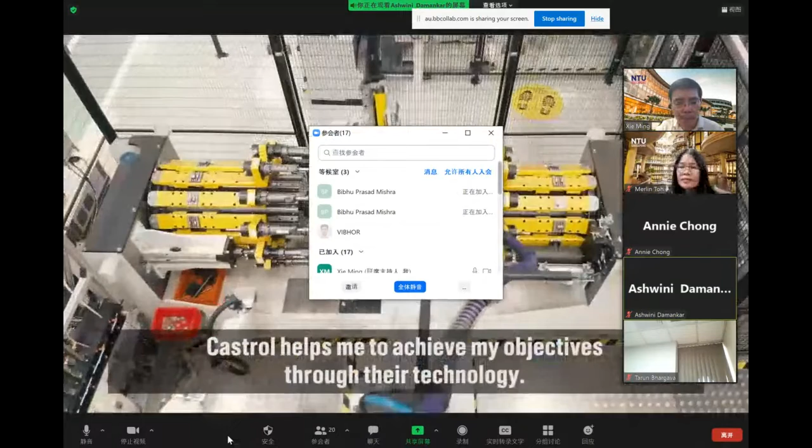When we work with Renault, we try to put the best product, but not only the best product, the best technology and the best team inside to manage this combination of product, technology and process.

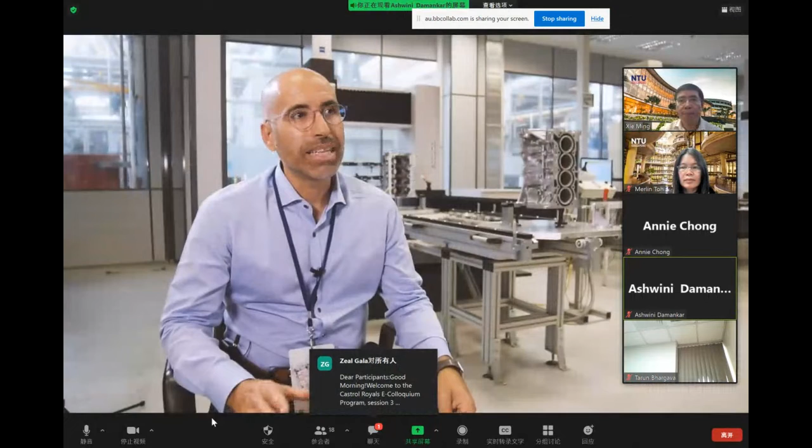What are we looking for about lubricant suppliers? It's the most cost-effective product to go with very effective facilities with digital monitoring. This is clearly the case of the XBB technology and CCC, the Coolant Compatible Cleaner. We understand that one of the needs the customer has is reducing waste of water and cleaner.

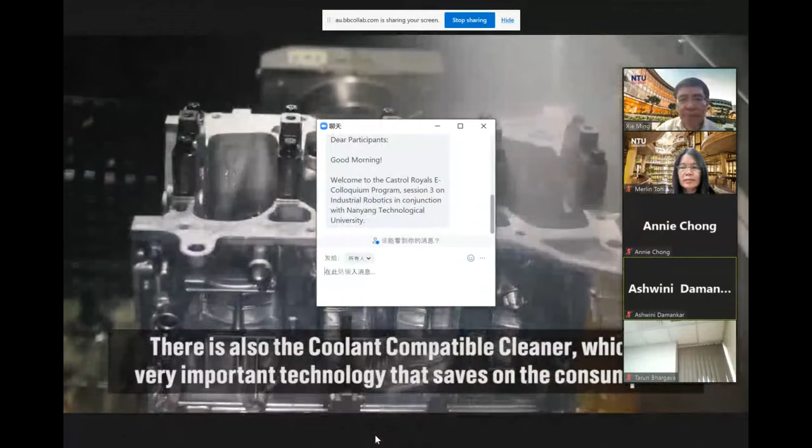With this great innovation from Castrol, we are able this year to save 1 million liters of water.

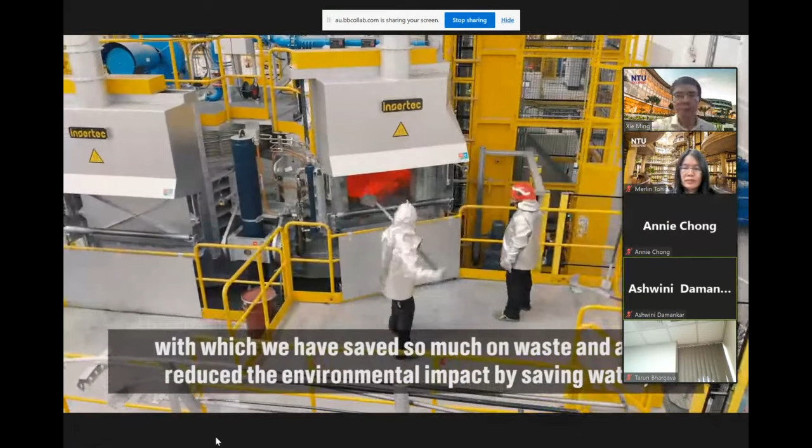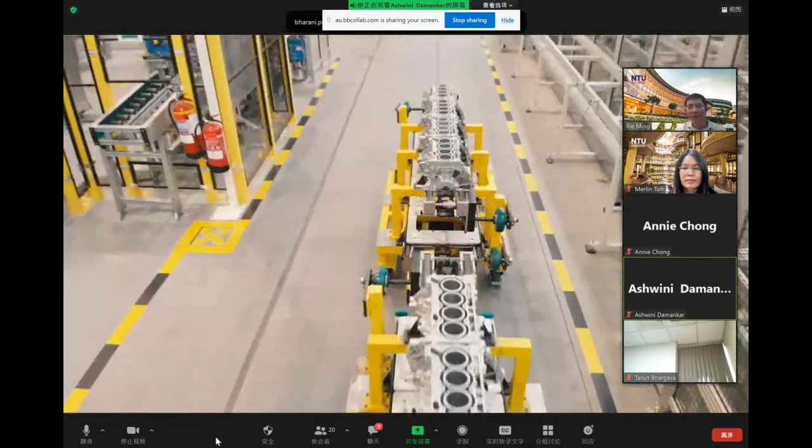When we have this combination of coolant and compatible cleaner inside, we put another resource in place - not only the team who manages this, but the Smart Control system that we can use to control 24/7 all the key parameters in the coolant and the cleaner. That's how we close the cycle.

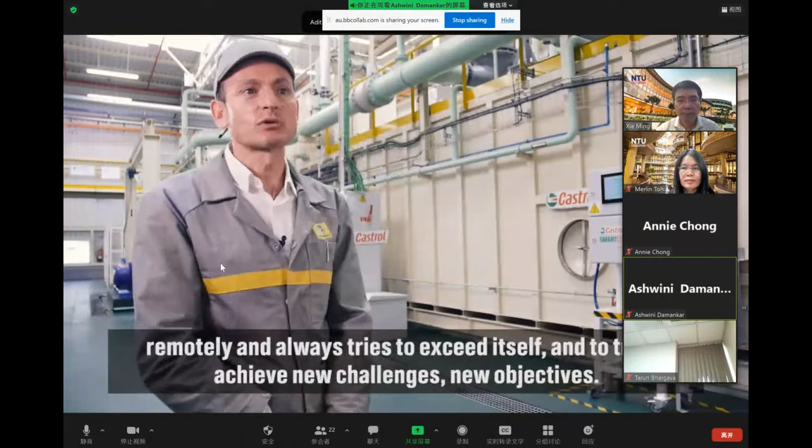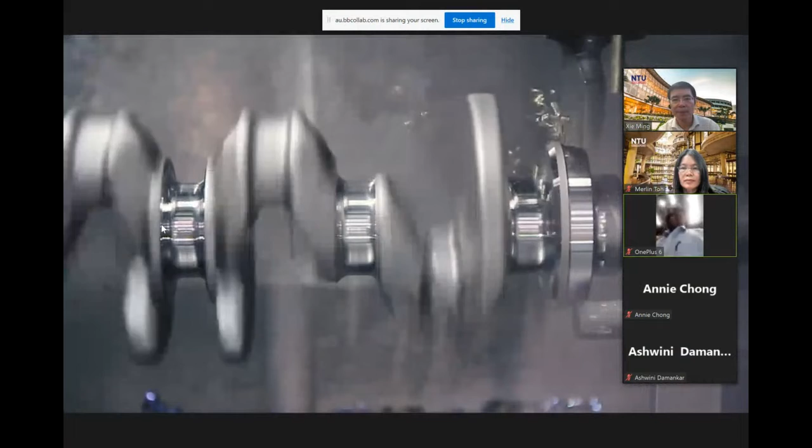This is a real partnership. This is not a relation of supplier-customer. The partnership with Castrol is very powerful because Castrol is not expecting the request from Renault, but is very proactive in the way of making new proposals, new innovation proposals.

Today we have new products with new innovation. We don't know exactly what the future will be, but we know that with Castrol's partnership we can reach the sky. We can give the best cost-efficient products to our customer. We know that Castrol will bring us new digital innovation to follow the efficiency of the plant.

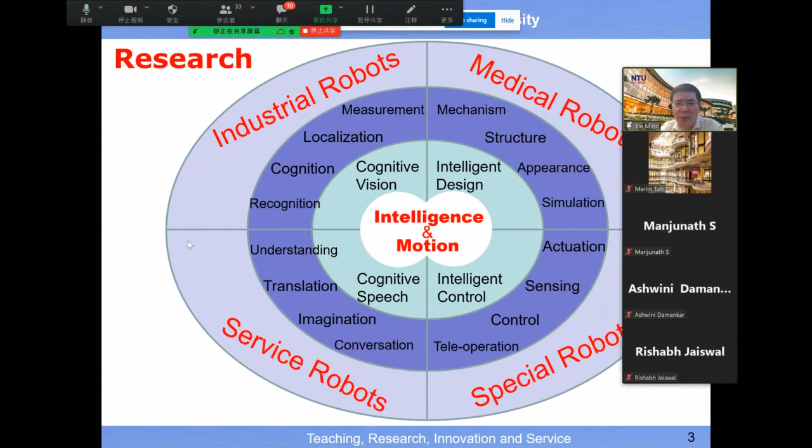From this, you can immediately understand the current state of the art in robotics, and in future the human-like robot may work in production lines, in manufacturing industry. Today, when we talk about industrial robots, the main focus is on the arm manipulator, but in future the arm manipulator can become a dual arm in the form of a human being.

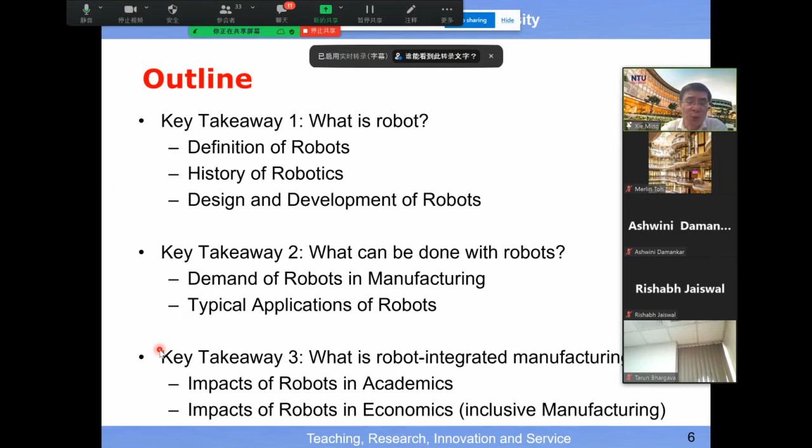So for today's session, since we are going to have 3 hours together, I will split today's session into 3 parts. The first part is about the definition of today's robot and the major steps involved in the design and development of a robot. The second takeaway is about the possible application domains in which we can deploy a robot.

And here I use this technical term, robot integrated manufacturing. I believe most of you have heard of Industry 4.0. Then you may ask yourself, what is the nature of Industry 4.0, and what will Industry 5.0 be? You can start to think about this question: what should be the next generation after Industry 4.0? If you start to think in this direction, then you may appreciate today's session, and later on we may have some discussion or Q&A.

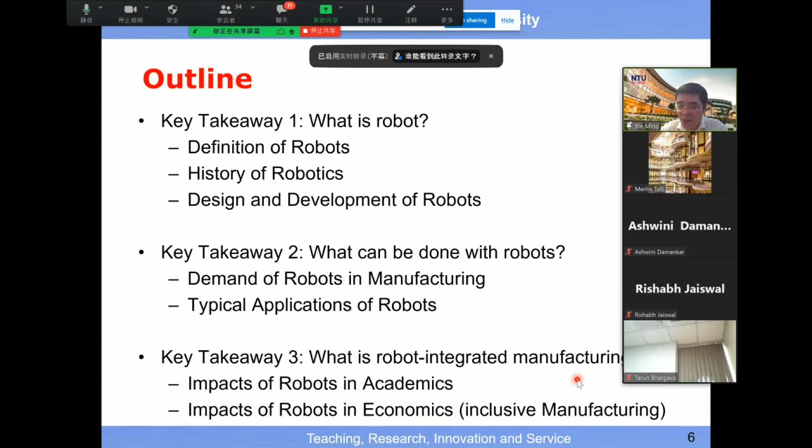So let's start with the first part, which is for us to know what is the nature of a robot, what is the new definition of the robot, and what are the key steps involved in the design or development of the robot.

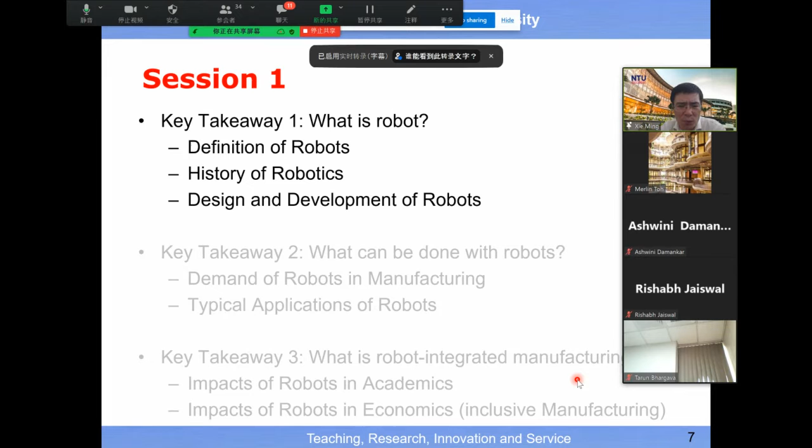Then you may ask this question: why do we need to invent machines, to invent tools in industry? The answer is to extend our physical capability and also to extend our mental capability. So if we enhance humans' physical capability by the use of a robot, then you may ask the question, how do we position a robot?

Today's robot can perform motion, and maybe tomorrow's robot may have human-like intelligence. Maybe after tomorrow, the robot may have life-like characteristics.

Okay, eventually we may put the robot inside this tree of life. So this is something for you to start to think about. Then what is life from an engineering point of view?

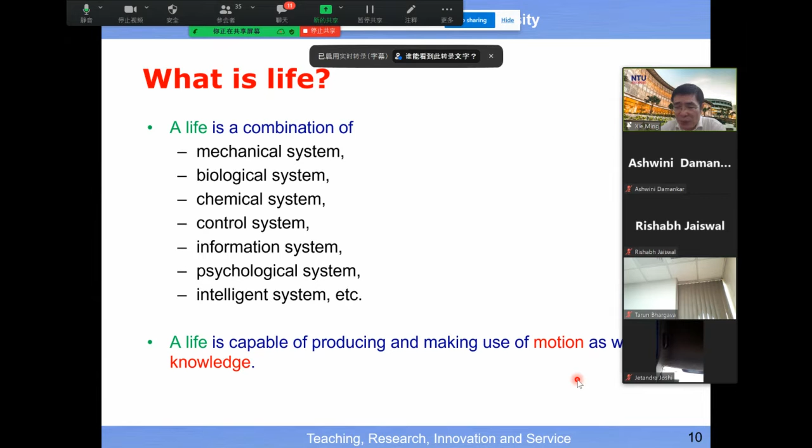Then the next question we may ask is: what are the limitations of life in the world, like animal and human being? And even for human beings, we can identify two major domains in which we can easily name some limitation. For example, for human beings, we cannot fly, and we cannot dive deeper inside the water. So that is a limitation.

That means we are limited in time, in space, in terms of the speed of motion, and also for the payload we can carry, we also have limitation. But in terms of knowledge, you may also see some limitation. For example, we may spend almost 20 years in school studying in order to get our PhD degree, master degree, or bachelor degree. That means it takes a long time for us to acquire knowledge.

And in order to process knowledge and perceive information, for example, our eye cannot perceive invisible light. And also about language, we can only understand or interpret the voice which is familiar to us. For example, if I start to speak French now, and for those of you who do not understand French, then you cannot understand what I'm talking about. So that is a limitation. We have a limited capability to interpret voice, etc.

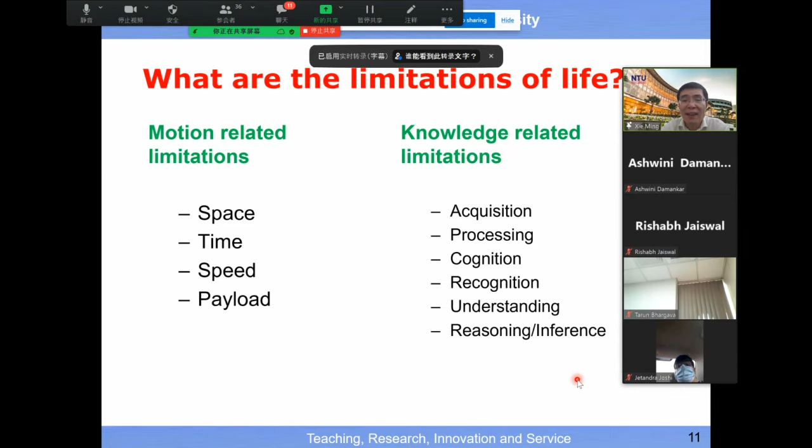So you will see for life, we have a lot of limitations. Then how to overcome our limitation? Just now I already mentioned. So the universal way to overcome our limitation is to invent tools and invent machines. Then in this way, this tool, this machine can help us extend our mental capability in terms of perception, processing, decision making, and also extend our physical capability in terms of locomotion, grasping, and manipulation.

So this is why we invent airplanes, so that we can also fly. We have a robotic arm, therefore we can overcome our limited payload, because we can use a robot to carry heavy payload. And in future maybe we can have a robot to assist us to study. Then in this way we can shorten our learning curve. Instead of spending almost 20 years studying in school, can we shorten this cycle time from 20 years to 10 years or to 5 years? So that is the motivation behind the invention of tools and machines.

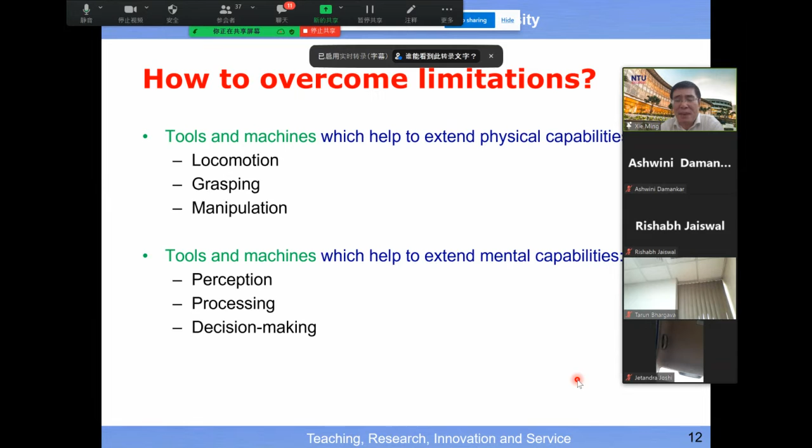Then the good news is, among all these machines, one special type of machine is called a robot. And in particular, we have robots which could be deployed in industry. So therefore, it is interesting for us to know or to understand the capability of industrial robots.

All right, okay, come to this question. Among all the inventions, what should be the most powerful one? Or if we do a little bit of analogy between invention or creature by nature and creature by human being, everyone understands that the most advanced creature by nature should be human being. Yes or no? It should not be the elephant, we are smarter than the elephant. Should not be the horse, though the horse can run very fast. But globally speaking, human beings are the most advanced creature by nature.

Then among all the machines, what should be the most advanced one created by human being? The answer should not be the airplane. Although the airplane can fly in the sky, in terms of complexity of motion, the airplane only has 6 degrees of freedom: 3 translation, 3 rotation. But for the humanoid robot, for example, the robot which looks like a human being, such a robot has at least 40 over degrees of freedom. So in terms of complexity of motion, humanoid robot is more complicated than an airplane.

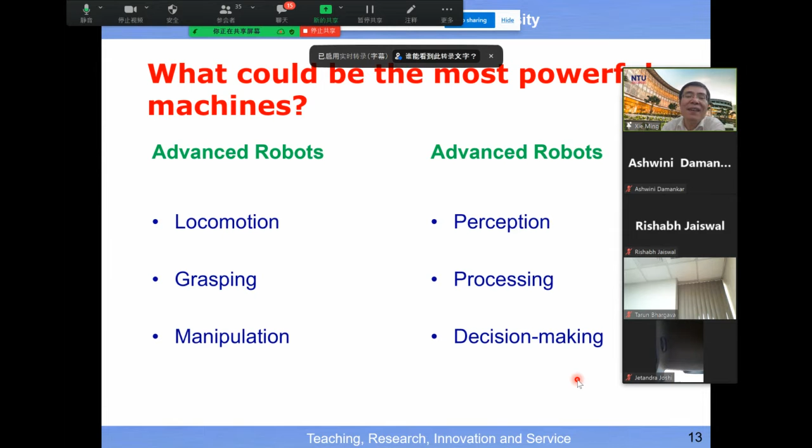So this slide helps you understand this exciting type of machine invented by human beings. Now I'll quickly go through some typical application scenarios in which we can make use of industrial robots or service robots. But I will come back again to industrial related applications.

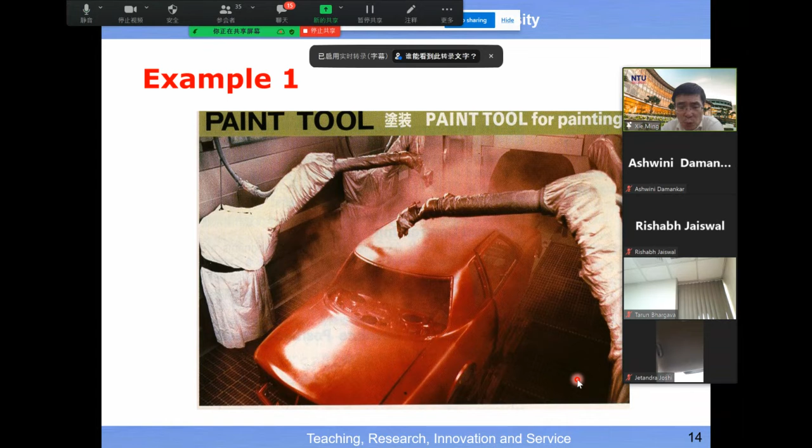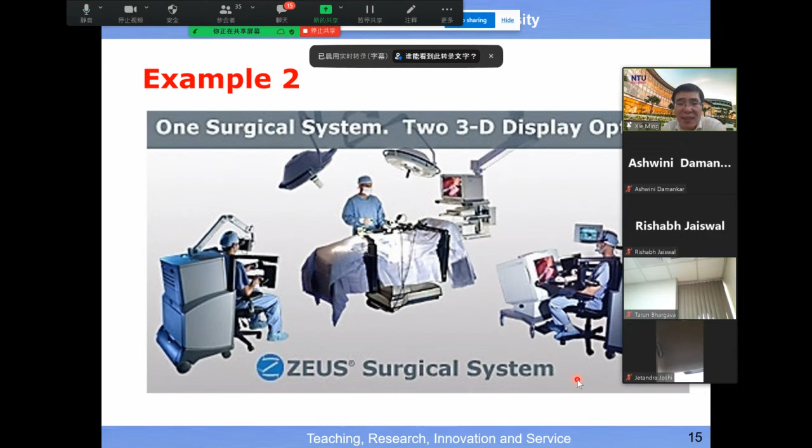By seeing this picture immediately, you understand robots can help us do painting, and robots can extend doctors' physical capability to undertake surgical operations in a very, very confined space, for example inside the body of a human being. And also robots can help us extend our physical capability for building construction.

So you will see human beings just sit inside the control room. This is the indoor environment. Then for the outdoor environment, we let the robot do the job for us, because the outdoor environment could be humid, could be at high temperature, okay, or a noisy environment or dangerous environment, etc. Therefore human beings just sit inside the control room, right?

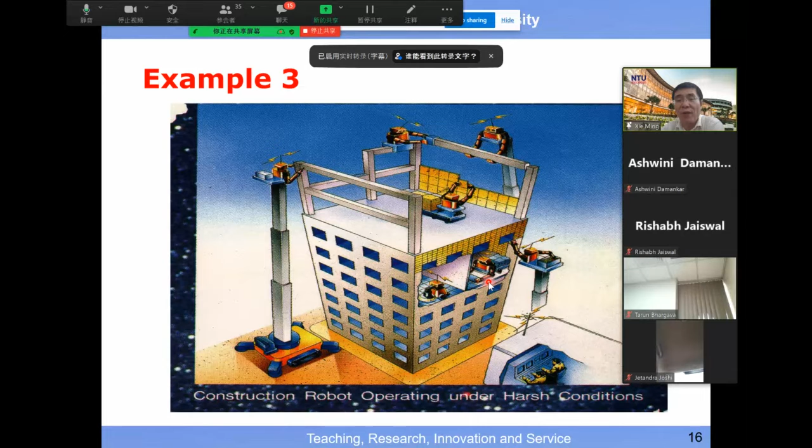If you follow the old definition of the robot, you may notice that the statement is not relevant to this robot, because the old definition basically follows the definition advanced by the Robotics Association in the USA. That definition is suitable for an industrial robot, but today's robot has already exceeded the capability of an industrial robot in the old days.

So here I just highlight 3 key points inside the definition of today's robot. The first key point is about the performance of motion. A robot must be able to automatically perform a motion. So this is key point number 1.

And key point number 2 is that today's robot must have the capability to interact, and proactively interact, with a human being or human operator. So this is key point number 2 inside the definition of today's robot.

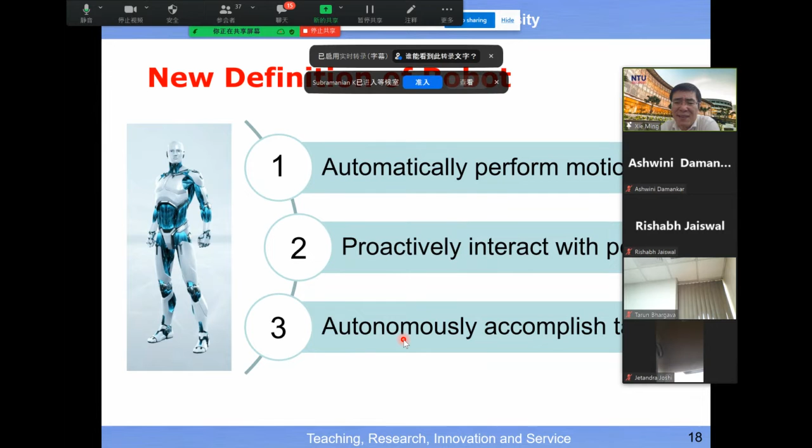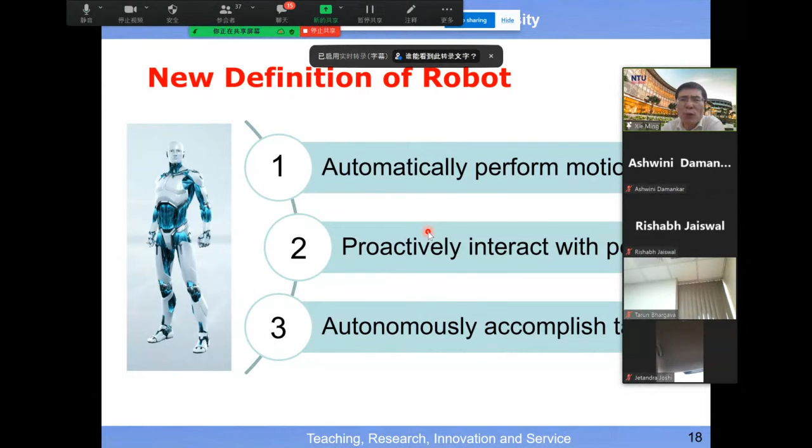And key point number 3 inside the definition of today's robot should be the capability to accomplish tasks. So these are the 3 important key points for today's robot to achieve in order to be qualified as a robot. So now we understand the definition of the robot.

So there are 3 key points inside the definition, and now let's look a little bit at the history of the robot. If you look at the history over the past 1,000 or 2,000 years, you will see 500 years before Christ, almost 2,500 years ago, we have an invention made by human beings, by our ancestors. At that time people had this creativity of inventing human-like creatures.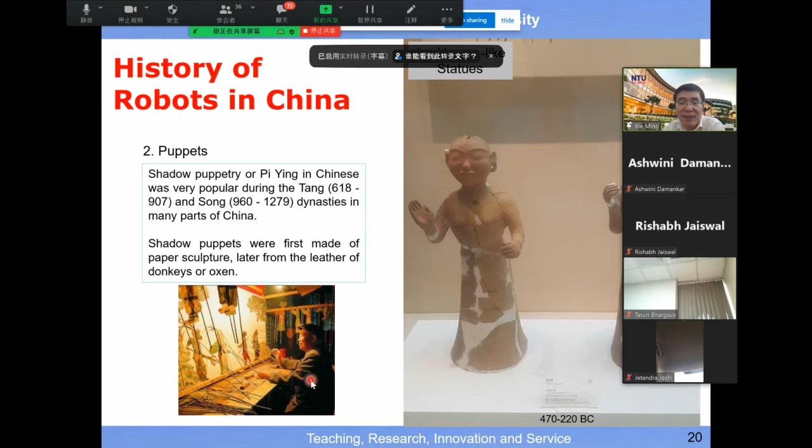In this scenario, you see the energy comes from a human being. The human being's energy is transferred into the mechanism of the creature, so that this machine can also undertake motion. This could be the starting point for our ancestors in the early days to have such intention to invent a human-like machine.

But in the past 100-plus years, less than 200 years, this is the modern history of robotics. We need to remember 3 important events. The first one is about the birth of the term robot, which occurred in year 1921, when this technical term 'robot' was invented. Then the second event is about the inventor in 1941.

Then the robotics term has been invented. So the third one is about the birth of the robotics industry. What was the first company in robotics to be set up? The answer is this one: in 1956, the first robotics company was set up in the USA. But actually before this, people had already developed a teleoperated device, but it had not yet been commercialized. It's not a commercial product, just a prototype.

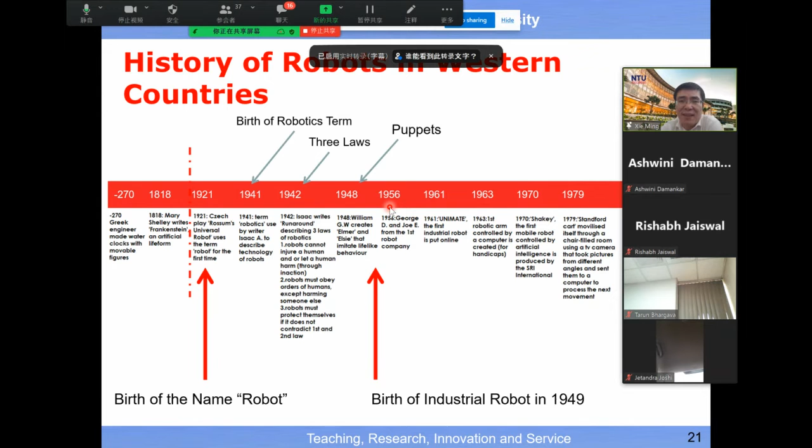So this setup in robotics occurs in the year 1956. This just gives you the idea about these three important events in the modern history of robotics: one was the term 'robot' was invented, another was the term 'robotics' was invented, and the first robotics company was set up in the world.

Then it's interesting to know, if you look around the whole world, which country has put the most effort into the development of the robot? The answer will be Japan. It's not the US or Canada, not France, Germany, or UK. I believe it's Japan, which has put the most investment and effort into the development of robots.

If we ask you to name the top companies that sell industrial robots, you could name at least two companies from Japan. Motoman is one of them. Then there's another, Fanuc is the second company. So there's the Fanuc robot and the Motoman robot - these are the two leading companies in the world offering industrial robots.

Then in Europe, you have ABB, a company from Sweden. Then there's another, previously called KUKA, from Germany. And in the US, you may name Adept. But if you compare the strengths and state of the art in industrial robots, I believe the top three are ABB, Fanuc, and Motoman - two of them are from Japan.

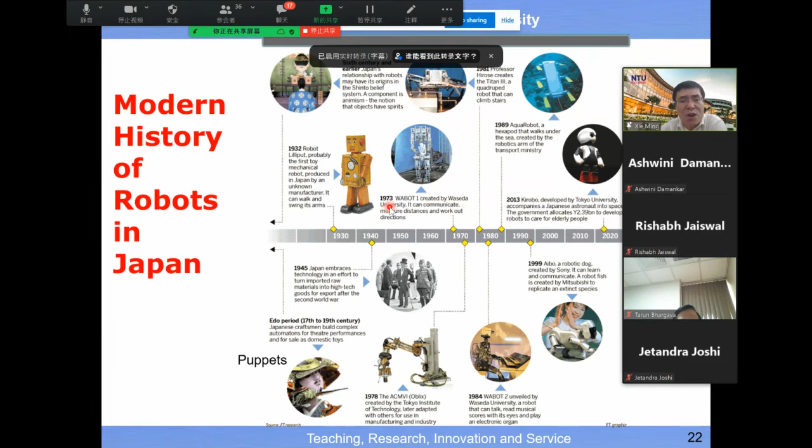Besides that, Honda, an automobile company, has developed the most advanced humanoid robot. This slide highlights a bit of the short modern history of robotics in Japan - a very interesting country that has paid a lot of attention to the development and advancement in robotics. If we look at the history of robotics from a single company, Honda is a car maker, not a robotics company, yet it has put a lot of effort into developing the most advanced robot, because the humanoid robot is more complicated than an industrial robot.

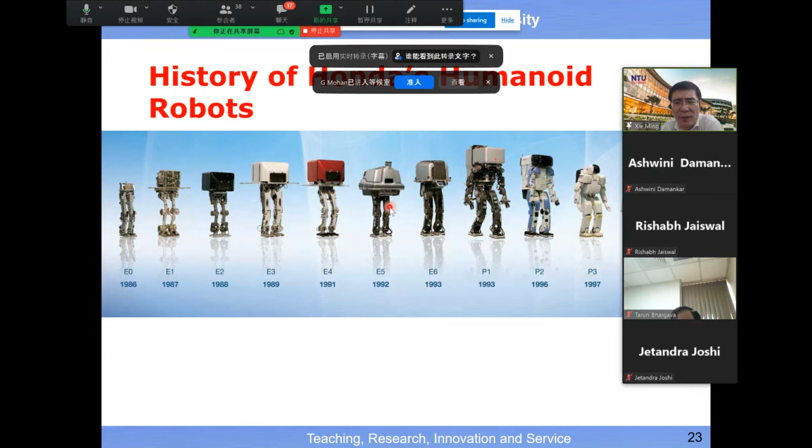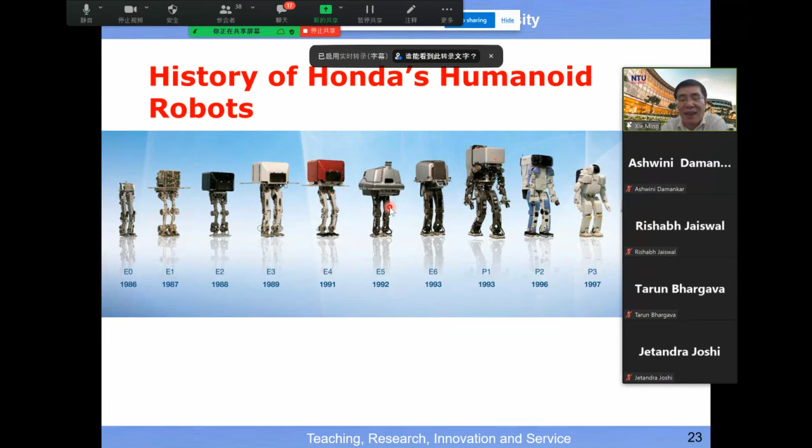So you will see that in the world, you cannot find a second company that can outperform Asimo, the robot developed by Honda, in terms of overall performance. Also there's the US company Boston Dynamics - at the beginning you saw the video, that humanoid robot was developed by Boston Dynamics, a USA company. But that robot only demonstrates motion capability; in terms of appearance and other capabilities, they cannot outperform Asimo, the one developed by Honda.

This slide basically shows you the capability of the humanoid robot by Honda - the overall performance, which involves locomotion, vision, grasping, and manipulation.

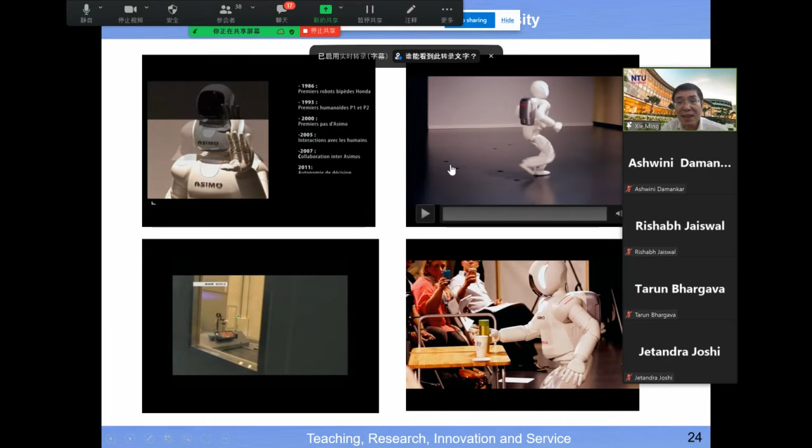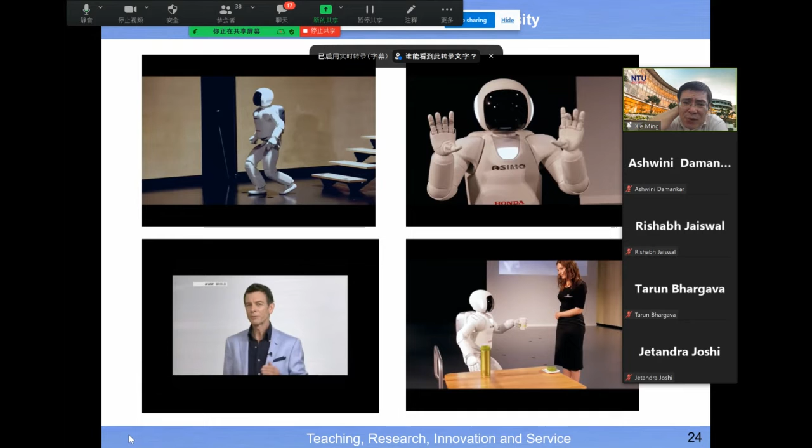Based on this result, then you can start thinking about the impact of a humanoid robot on industrial application. You can start to think about it, and eventually you may raise questions - during the Q&A session we can discuss this.

This slide gives you another view of the history of robotics in terms of prototype development, because we can classify robots into different types: mobile robot, arm manipulator, industrial robot, humanoid robot, and in general a service robot. We have at least four major types of robots, because service robot may cover the flying one, the swimming one, the diving one, etc. - we can lump all the rest into here.

Mobile robot may include today's vehicles, but we cannot name today's vehicle as a robot, because today's vehicles have not yet reached the level to perform motion automatically or autonomously. Also, there is a lot of research in the direction of developing autonomous vehicles.

This is an effort to make today's vehicle behave like a high-speed mobile robot. Now you see the importance of robotics, because we try to absorb the automobile industry and make it become part of the robotics industry. It's because a lot of technology developed in the area of mobile robots can be implanted into today's vehicle, making it a high-speed mobile robot.

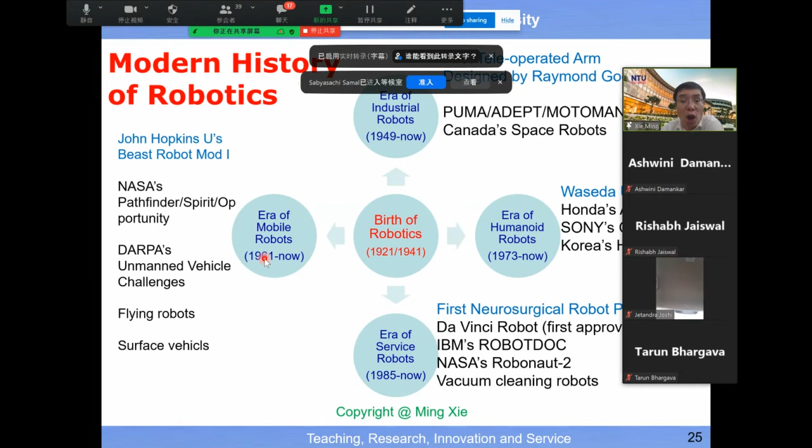And this one is very interesting eventually - a vehicle that moves on the surface of the water. So you become part of this mobile robot concept. That gives you an idea about the importance of robotics in the future.

Now we dive a little bit into the technical aspect of robots. What exactly is the detail of a robot? We told you the definition of a robot with three key points: a robot is something which can perform motion, a robot is something which can interact with a human being, and a robot is something which can perform a task.

The first module is motion planning. The second module is about kinematics, and the third is about the dynamics of the robot, and the fourth is about robot control. Then we may have another module about the design of the robot body. We may also have an entire course about AI or robot intelligence. This gives you the big picture of robotics in terms of technical detail.

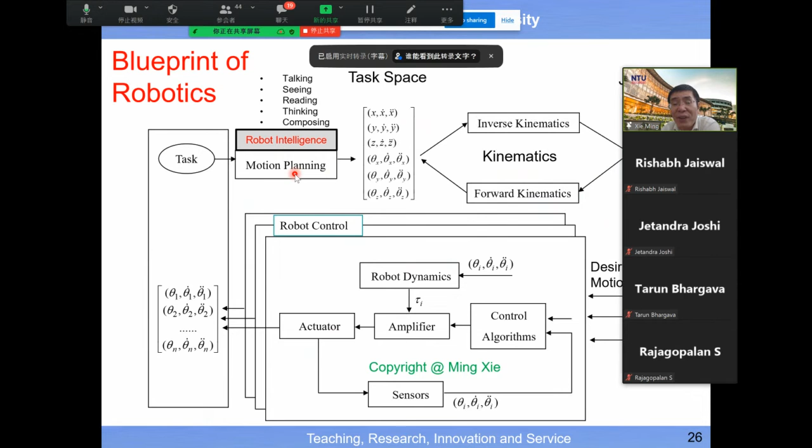This is why when you use an industrial robot, one tedious task is to teach the robot to perform your industrial task. Now you understand the answer already.

So we advocate this in year 2009, that means robot intelligence must enter the third phase or third generation. 8 years later, in year 2017, in China they recognized, okay, we must enter a new generation.

But they do not understand this slide. They do not understand which generation has already been reached. We are still in the first generation. Then they put themselves one generation behind today's state of the art.

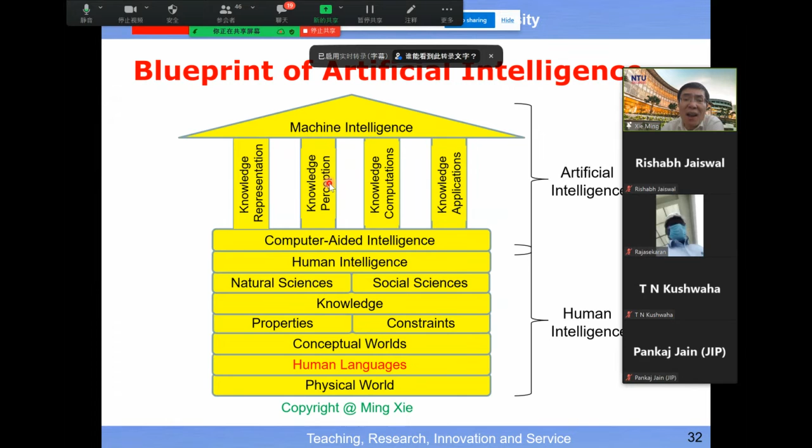Now here I show you the 4 pillars which enable us to reach this level of true machine intelligence. So these are the 4 pillars, okay? This is just for you to know.

Now I'll quickly go through the procedure to design a robot as a product. This is a general guideline for designing anything as a product, and we can also apply this procedure to guide us to design a robot as a product.

So in this way, since all of you come from industry, you can make a decision on buying a robot, then program the robot you bought, then automate your production line.

Or you can make another decision: setting up an in-house team to develop a customized robot to meet your production line's demands. Your in-house team can follow this procedure to design and implement a customized robot that meets your production line's requirements. So you have two options.

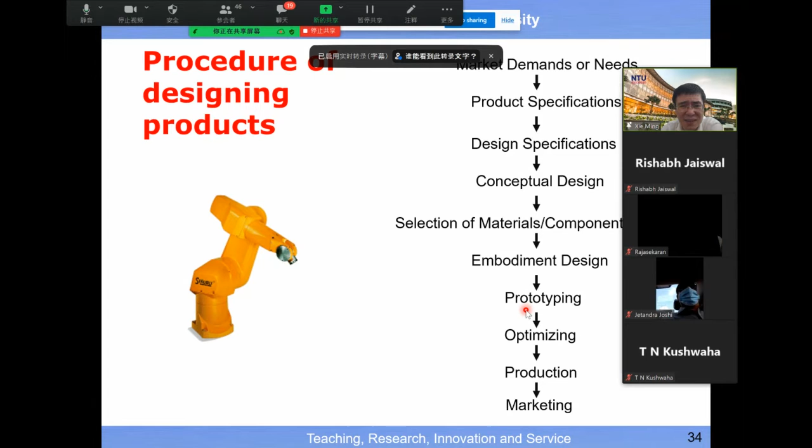So I've just shown you this knowledge and this guideline, so you can make these kinds of decisions. Once you decide to have an in-house team to develop a customized version of your own robot...

...in order to meet the demand of your own production line, this is the idea you need to have. A robot is basically a machine which can perform motion and also perform a task.

It can carry a tool. If the tool is a welding gun, it can do welding. If the tool is a paint spraying machine, it can do painting, etc. And the robot is programmable, so there is minimal interaction with a human being.

That means the user or operator can change the program, and the robot can respond to the new program uploaded inside it. Since you can change the tool and change the program, you can undertake different tasks.

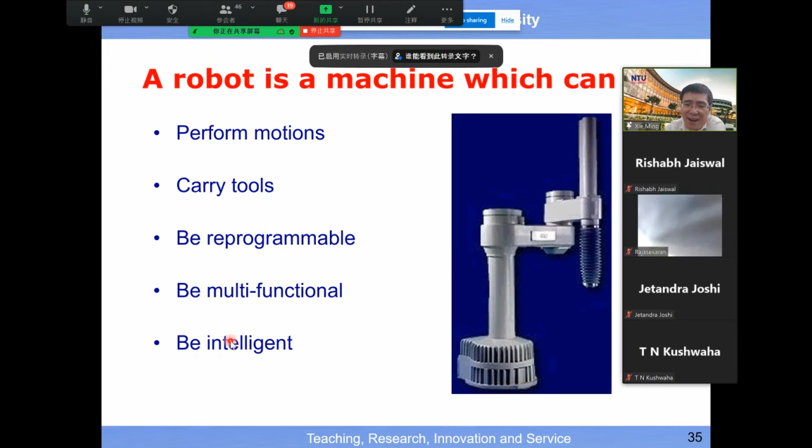So this is why we call it multifunctional, depending on a certain level of intelligence, etc. Once you are going to design your in-house version of a robot, then you need to have a team...

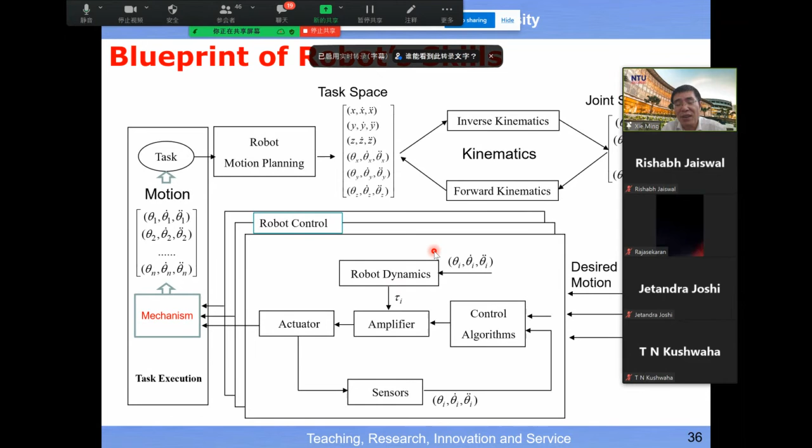...or sub-team: one to take care of the mechanism, the body of your robot; one to design the programming system of your robot; and another team to take care of kinematics, etc. Based on this blueprint, you can organize your in-house team into different subgroups already.

Then, what are the minimum requirements for your in-house team? You might say you cannot afford a full team to develop a product like a commercial product with complete features. So these are the minimum groups.

You need a group to take care of mechanism, one control group, and one programming software group, to cover the control aspect and the software aspect.

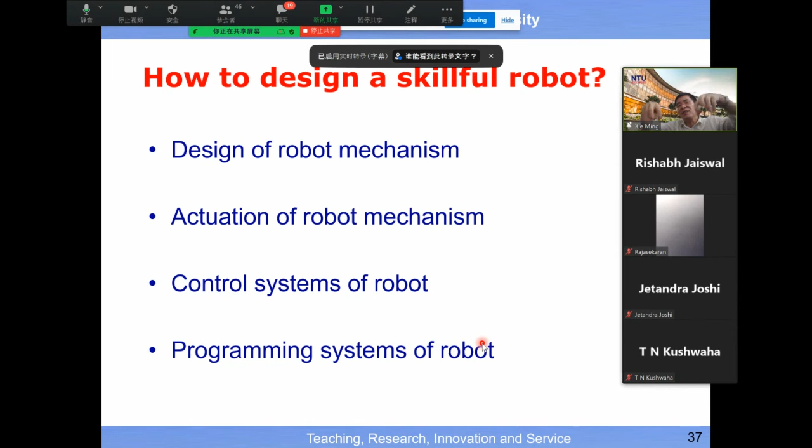So let's give you the answer. If you want an in-house team to build your own version of the robot, your in-house team must have at least 3 groups of engineers to work on this.

Then for your mechanical group, what should be their job scope? Their job scope is to design the mechanism, and the second is to take care of actuation, putting in the actuator to power your robot's body. So what is mechanism?

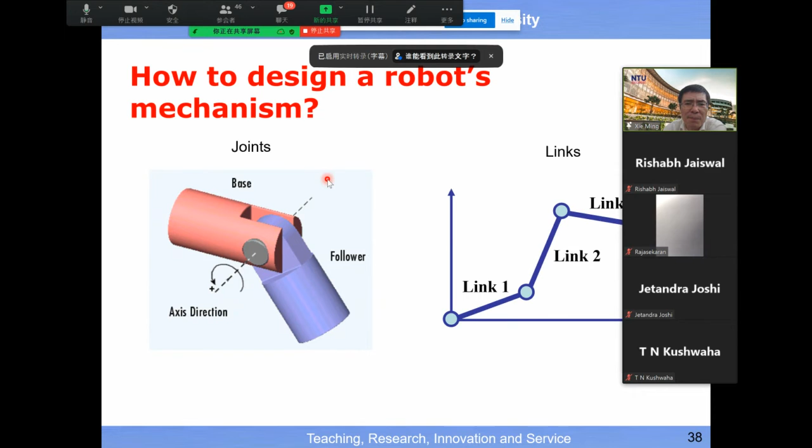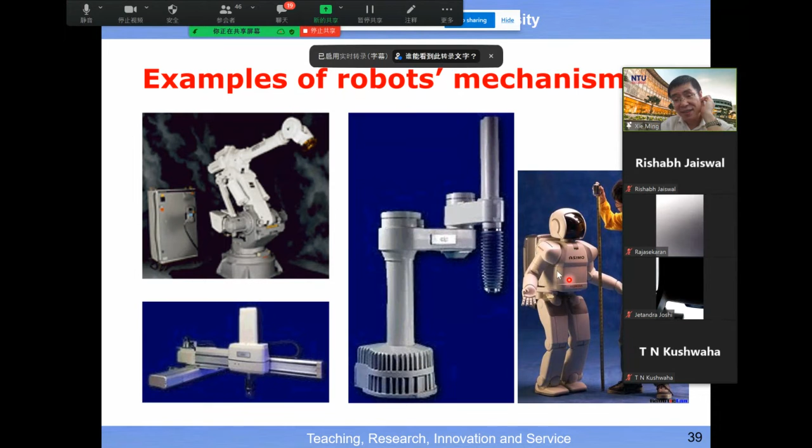So then the second job scope is to provide the motion to actuate the mechanism. Let me show the video because I need to turn this off. Actuation means what? To make your mechanism produce motion.

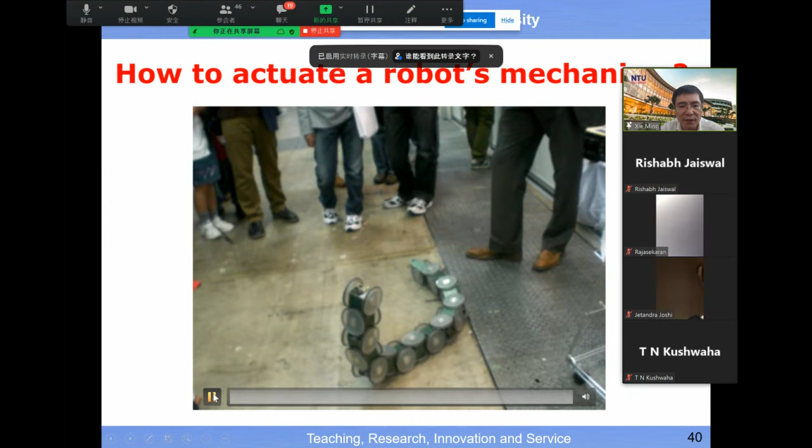This is something for you to know. The conventional way to actuate a robotic arm is to insert a motor actuator inside the joint. This motor actuates the joint, which drives the link, and I insert another motor here to drive the next joint.

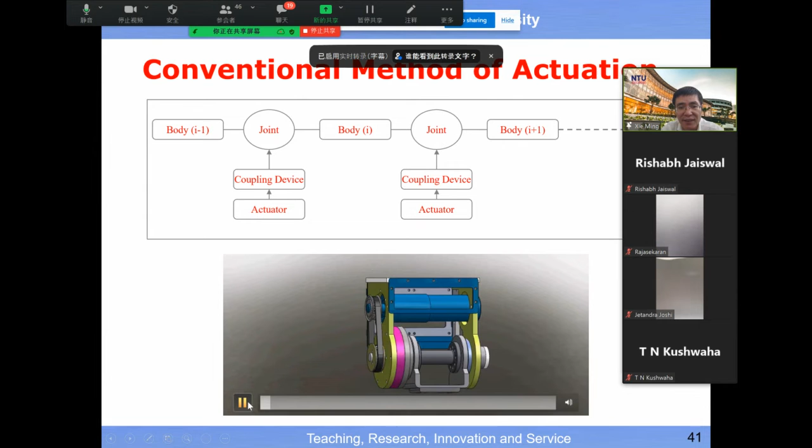A design example is here, let me show you. This is an actual design example for you. Here is the shaft of the joint, etc. And one more example here.

This is a SCARA robot, but this is a real design. For those of you with a design background, you can see this diagram. So you have a bearing, this is a motor, etc.

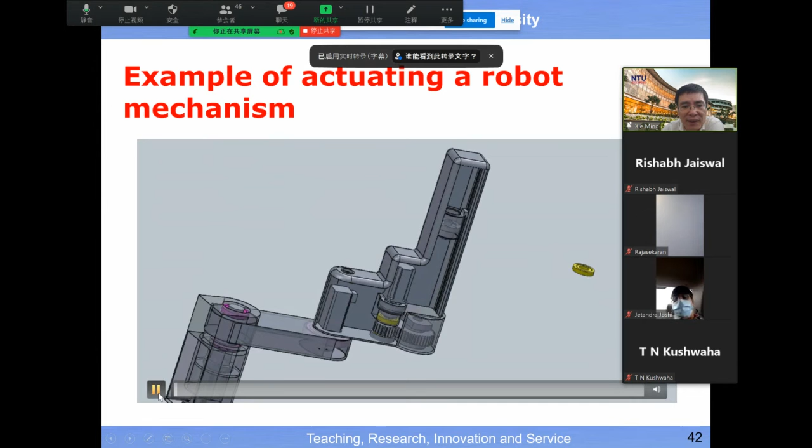The guiding principle is quite straightforward. Apply the guiding principle, etc., of the conventional design. I'll just quickly go through this.

So this is just an example for you to know. The conventional actuation actually is not reliable. If one motor fails, the entire body fails.

But in case of a human being, if I have a pain in one piece of my muscle, I can still move my arm. My entire arm will never fail even if I have some pain in one piece of my muscle. But how come for today's robot, if one actuator fails, the entire arm will fail?

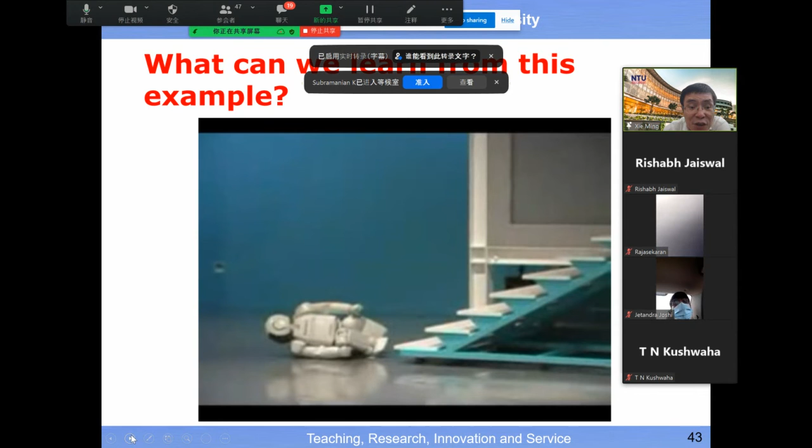So this is no good. Remember this. Is there any solution to overcome this? The answer is yes, because this is an invention by us in the year 2000, almost 20 years ago.

So then we achieve a similar result of human-like actuation. That means instead of doing one-to-one coupling, inserting one motor into one joint, we can do one-to-many actuation. If we can do one-to-many, then we can put two motors here, and each of these motors can couple to all these joints.

Then in this case, only when two such motors fail will the entire arm fail. If we have 6 motors driving 6 joints, then only when all 6 motors fail will this arm fail. So this is our solution, developed almost 20 years ago.

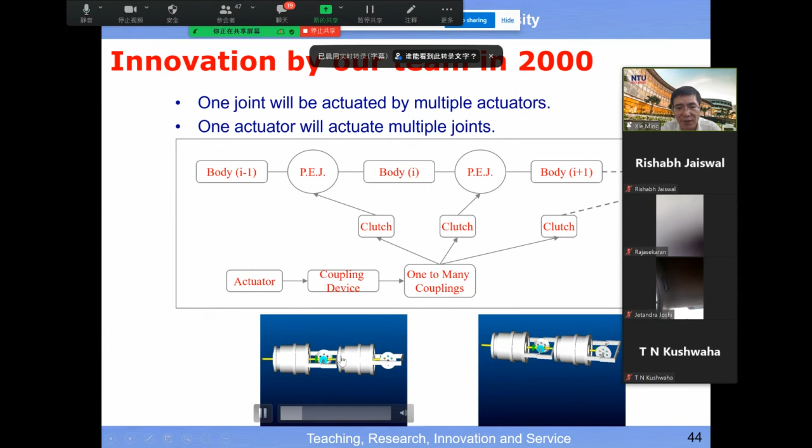So here we show you the prototype we developed. Inside here, you see one degree of freedom, second degree of freedom. So all this motion shares a single motor. And this is the real prototype.

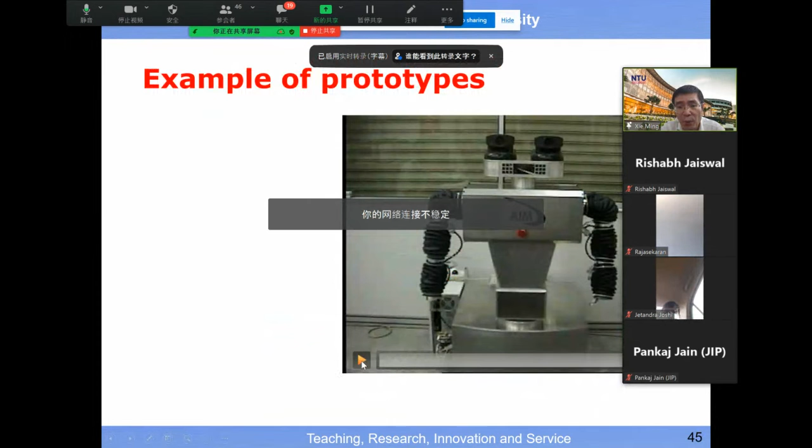That gives you confidence about the mechanical reliability of an industrial robot. If we really want to achieve this reliability, it's not an issue. So at least you can believe today's robots are very reliable in terms of motion execution, and that gives you this confidence.

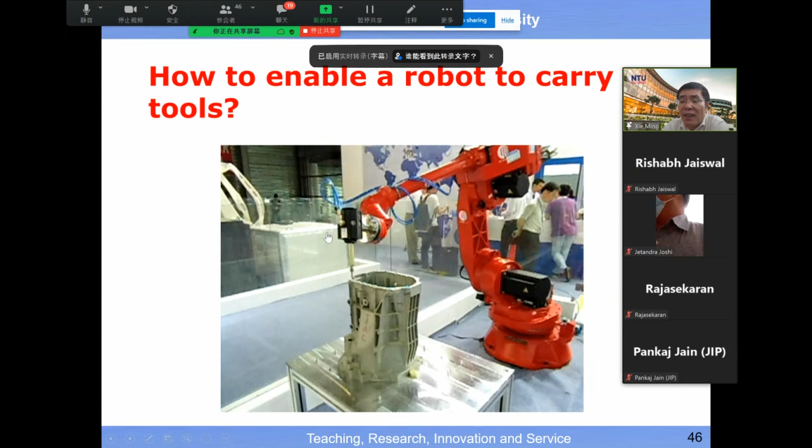Then how about the performance of a task? The answer is quite straightforward. At the end, at the hand of your robotic arm, you just attach different tools. If it's for polishing the edge of a workpiece, you attach one type of tool. If you are going to do welding, you attach another type of tool. So by changing the tool, you can let the robot perform different types of tasks.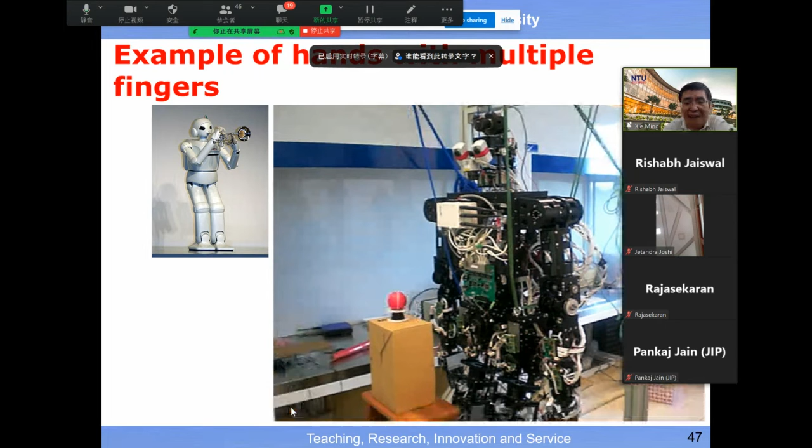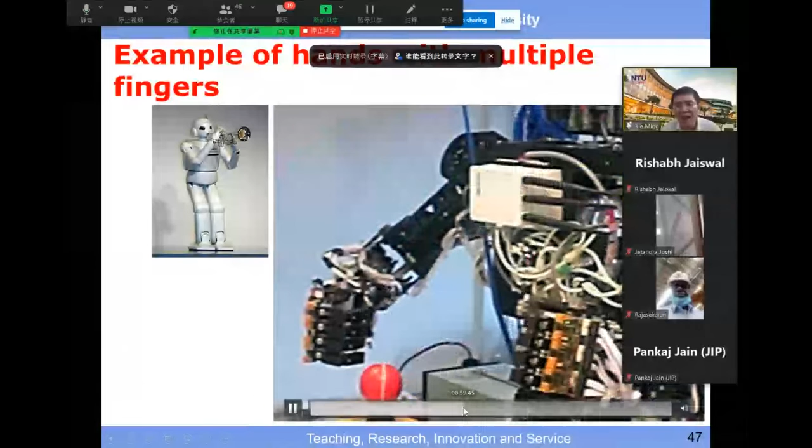But here we show you the autonomy for today's robot to achieve. This is just a typical example of hand-eye coordination, and this behavior is fully autonomous, performed by the robot. This level of task needs to undertake hand-eye coordination.

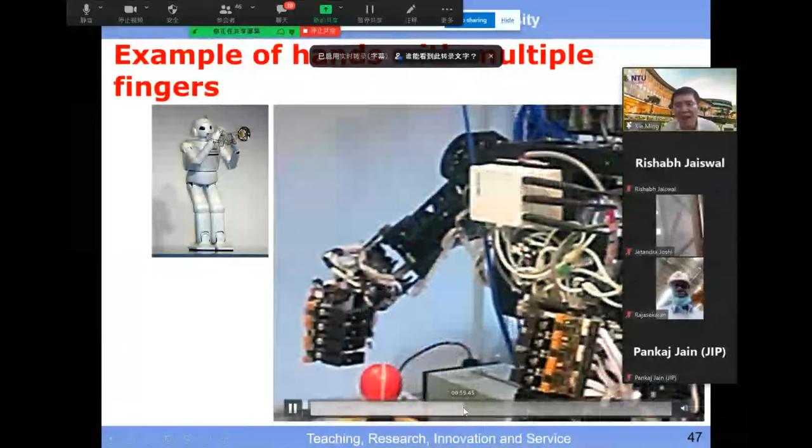So you must have an actuator, you must have a sensor to provide the feedback, you must have a controller. This is one control loop. You have another control loop, you have another control loop. Therefore, you have a multiple control loop.

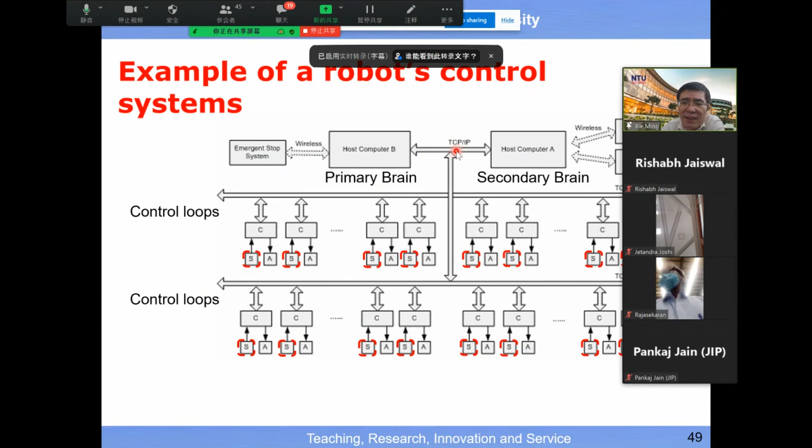And if your robot has many degrees of freedom, then the robot must have a powerful brain. Eventually, have a primary brain, secondary brain, like a human being's brain. So this is the hardware support for the control system design.

So then the third team should be software team, because you are able to control the motion of the robot's body. Then the next question will be, what should be the desired motion here? This information must come from the task to be performed by your robot. Therefore, you must have a team which takes care of the motion planning.

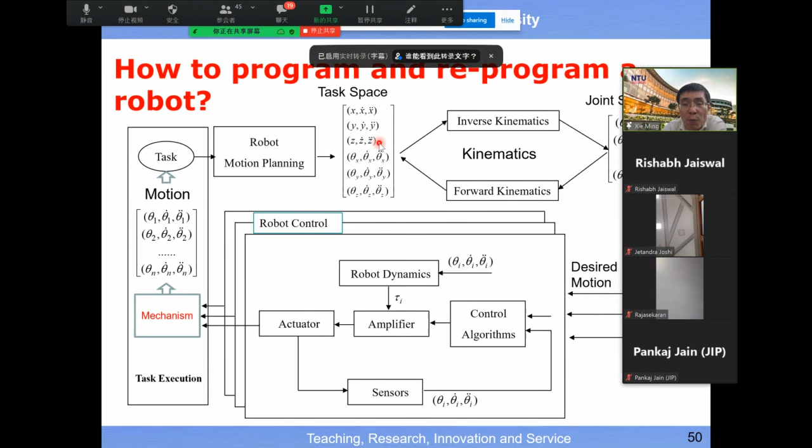So just now I asked you to think about this question: could today's robot take a task description as an input to automatically produce motion as output? The answer is no. This is what we want to achieve in future, to have a task description as input and let the robot do this instead of an operator, because today's robot cannot take this as input, since AI has not yet reached that level of achievement.

Then what will be the solution? We have no choice, we must employ an operator here. This is just for you to understand. When you deploy a robot in your production line, you need to spend time to do the setup, to do the programming, or to do the teaching, to teach your robot to perform the task.

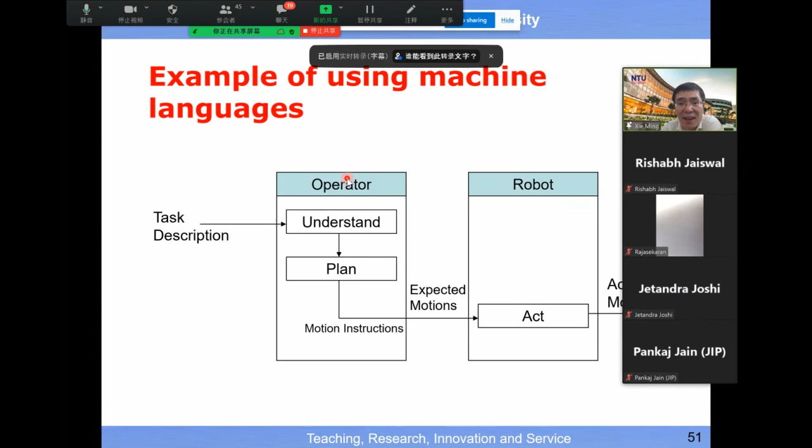So it basically is this scenario. Now you understand what's going on when you buy a lot of robots to deploy in your production line, and you see why you must spend a lot of time to program each robot. This slide helps you understand the answer already.

And next question you may ask yourself: how to shorten such a learning cycle? Because if I have to teach the robot every detail of every motion, it is time consuming. So could we increase the level of intelligence of today's robot and let the robot understand my requirement?

I just type a text to do this at what speed and what location. I type the text, the task description, then I input it to the robot, and the robot understands my description. So in order to do that, we need to design a 'robot brain'.

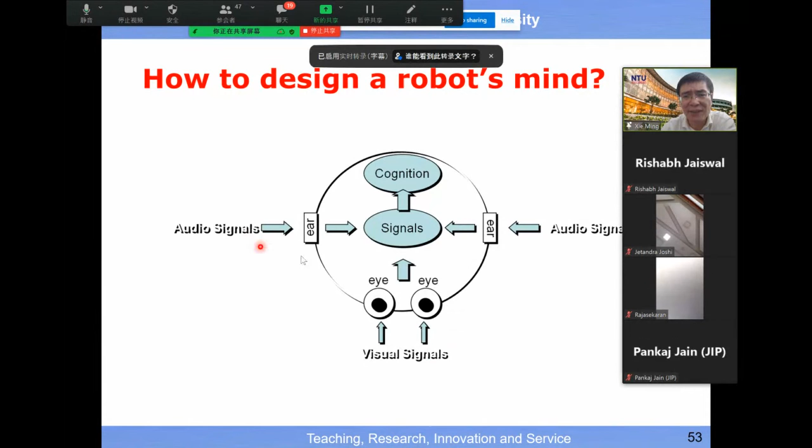So then the two major functionalities of a robotic brain are to understand the meaning from a visual signal, and to understand language. This is a challenge for us to take on, and today we are not yet there. We more or less are building up the new foundation.

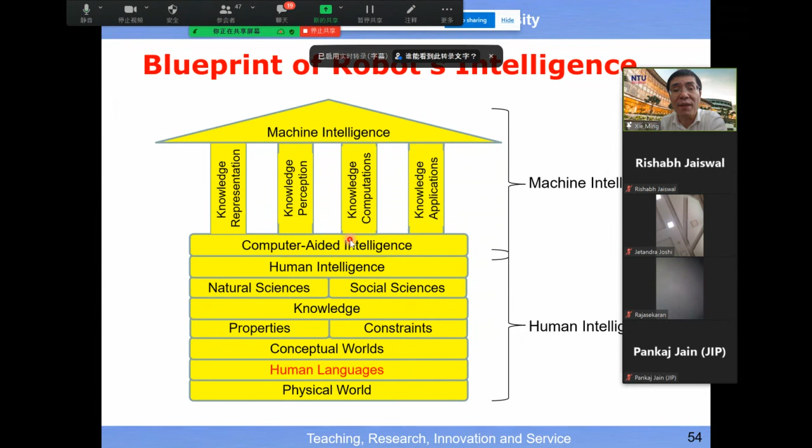All right, and this is a result of what we want to try to achieve, to make a robot understand human language, and this was almost 15 years ago. So this is very old, 14 years ago.